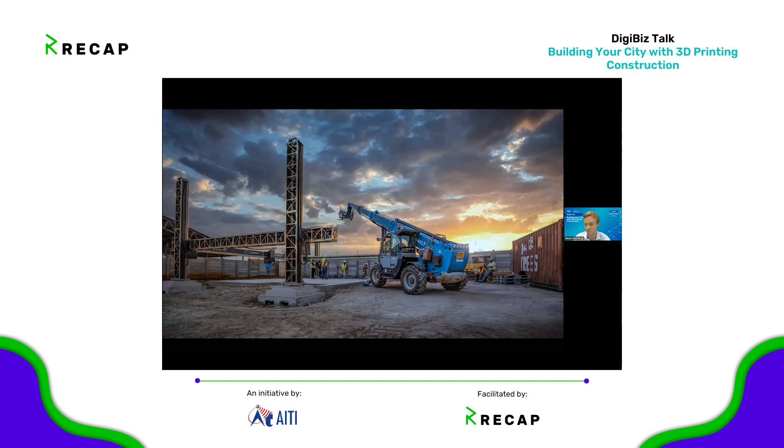COBOD International is a construction 3D printer company. You can see a brief version of it here—I think the image was great, so I wanted to start the presentation with this one. Basically, it's big 3D printers that we put on site to build houses. So let's go through what I'm going to cover today: a short introduction to who we are and what our product can do.

Then we'll look at some product examples—products that come out of our 3D printer. These products have been built throughout the world. I have a couple of examples from Europe with me, and I'm sure Akmal will show something more local afterward as well. Then we're going to talk a little about the benefits of choosing 3D concrete printing and COBOD.

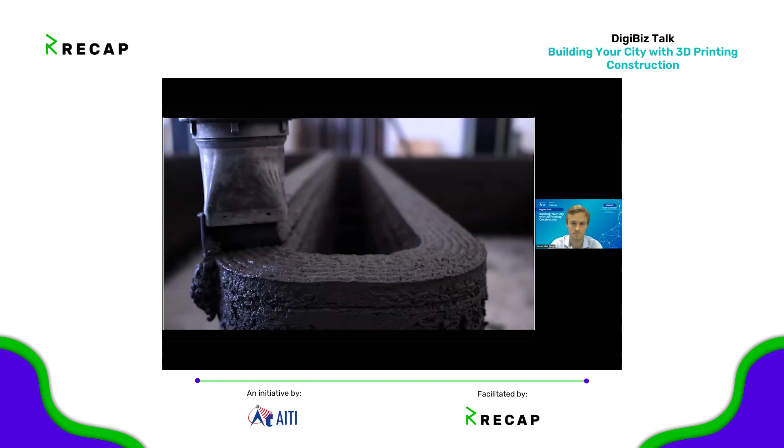I want to start with a little video to give you an understanding: what if your next building came to life faster, better, cheaper, more sustainable? At COBOD, our mission is to build smarter through multifunctional construction robots based on 3D printing technology. Our vision is to automate a minimum of 50% of construction processes on building sites around the world. We partner with our customers, suppliers, and academic institutions around the world to build a future-proof, modular, and scalable 3D printing and multifunctional robotic solution based on an open-source material strategy.

COBOD is headquartered in Denmark with regional competence centers in the US and Malaysia, plus distributors and customers on all continents. COBOD's key shareholders include iconic giants like General Electric, PERI, and the world's largest cement and concrete manufacturers, Holcim and Cemex.

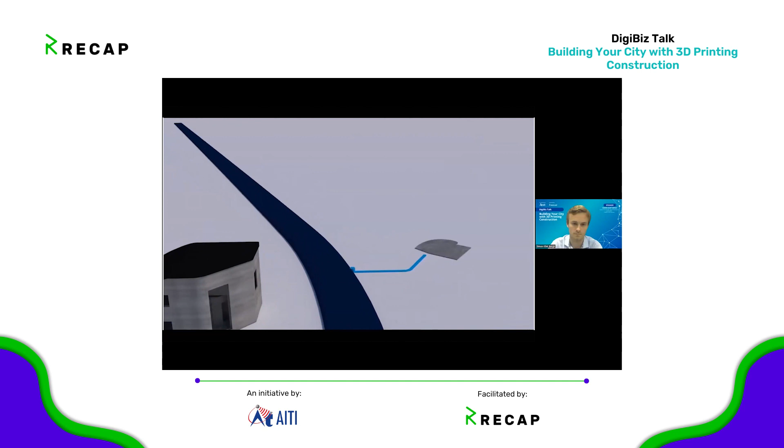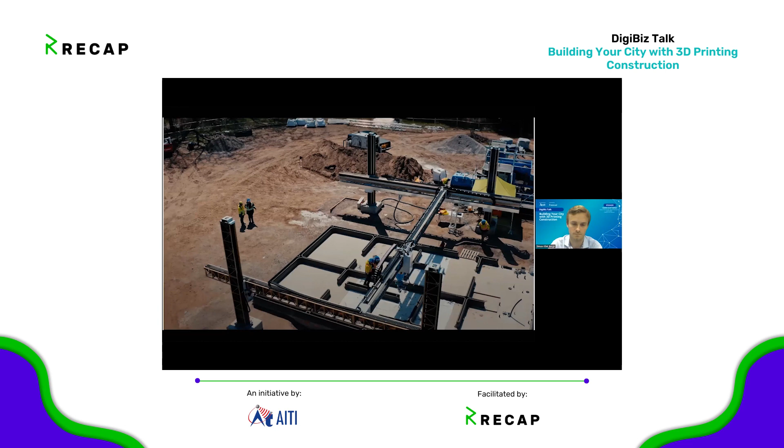We printed Europe's first building in 2017. Since then, customers using our 3D construction printers have printed the very first 2- and 3-story buildings in Europe, the US, and India. COBOD 3D construction printers are now active on 6 continents. We've sold the largest number of printers globally for a variety of building applications—not just residential houses, but commercial, educational, and industrial applications, and even wind turbine bases.

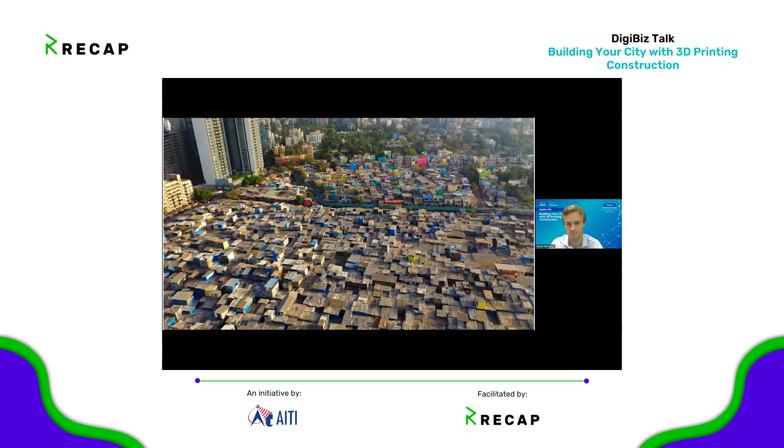We do not come to work just to make a living—we are here for a purpose. 3 billion homes are needed in the coming decades to meet population growth, while conventional construction prices are rising, making them unreachable for the people who need them most. The solution demands action and disruption, transforming conventional practices with tech-driven, efficient methods of automation.

At COBOD, we're disrupting global construction in cooperation with our partners and our team of 100 professional pioneers made up of 25 nationalities. Our roots are Danish, merging an experienced senior management team with young tech wizards, plus a multicultural operational team ready to assist on the ground in multiple spoken languages. We dare to develop cutting-edge innovative solutions which optimize the value for our customers.

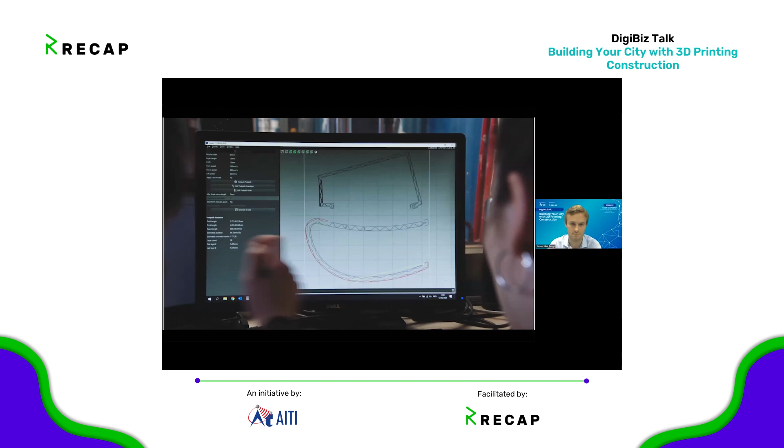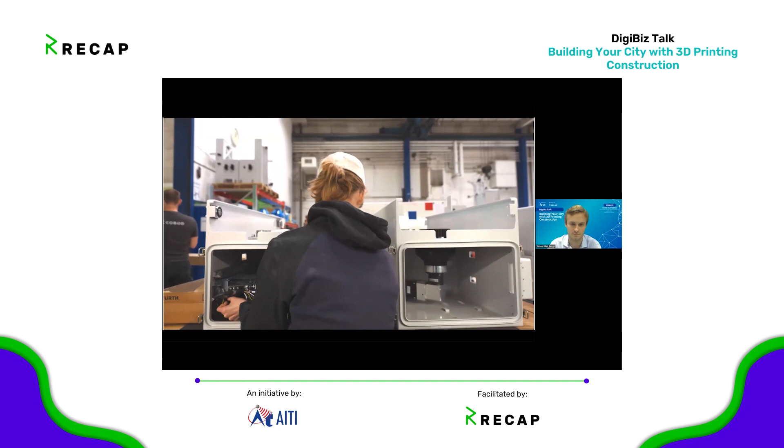We are thought leaders with our new state-of-the-art tech solutions, application areas and size, as well as our material innovation. Our exponential growth documents our customer satisfaction and centricity. Our continued success is directly linked to our customer satisfaction.

We hold your hand all the way from training to installation, making you a world-class 3D printing expert and constantly ahead of tomorrow. We deliver a turnkey solution, including our printer gantry system, a mixing batch plant, pump, and our proprietary slicer software. Our machines are CE certified, giving you peace of mind.

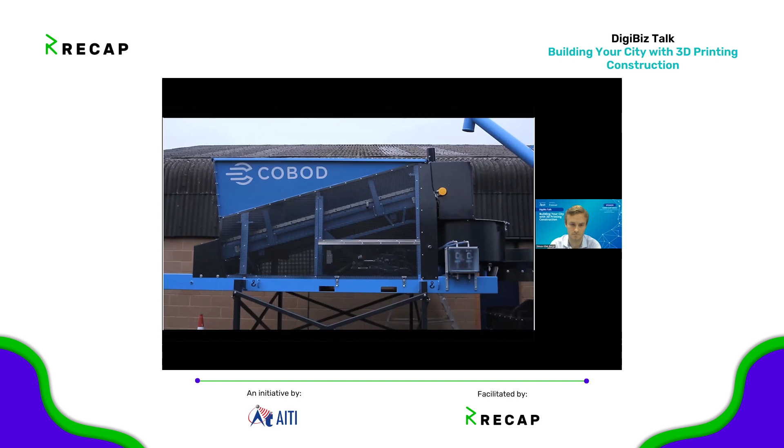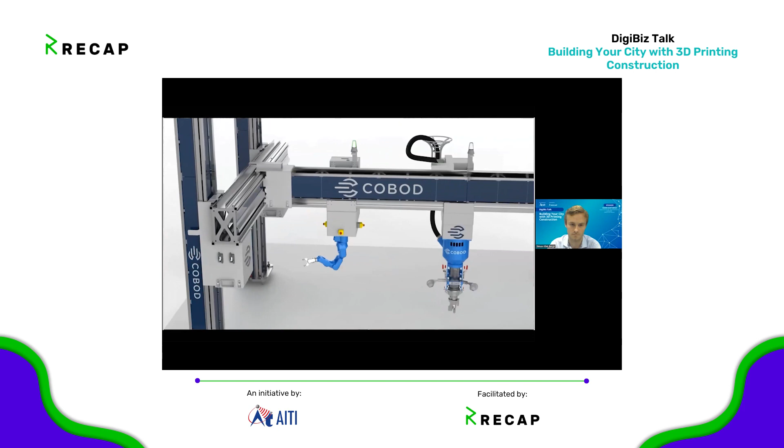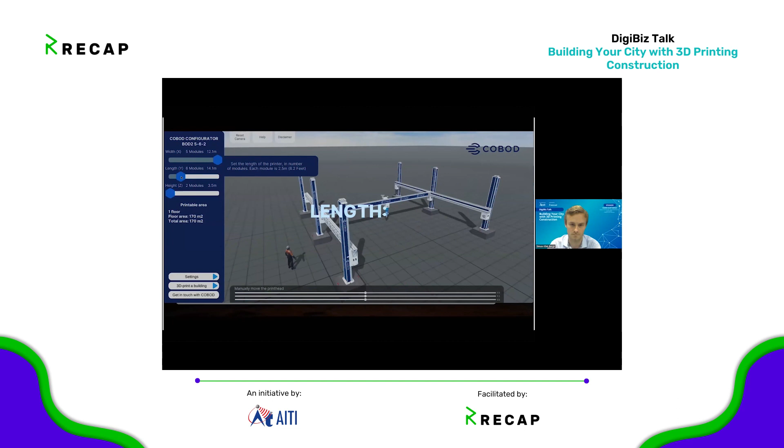We deliver a future-proof solution. Today, a 3D construction printer, and tomorrow, a multifunctional robot, constructing much more than just 3D printed walls. And it can always be upgraded, built on a modular and scalable design where you can always make it bigger and have more features. Use our website configurator and design your own printer.

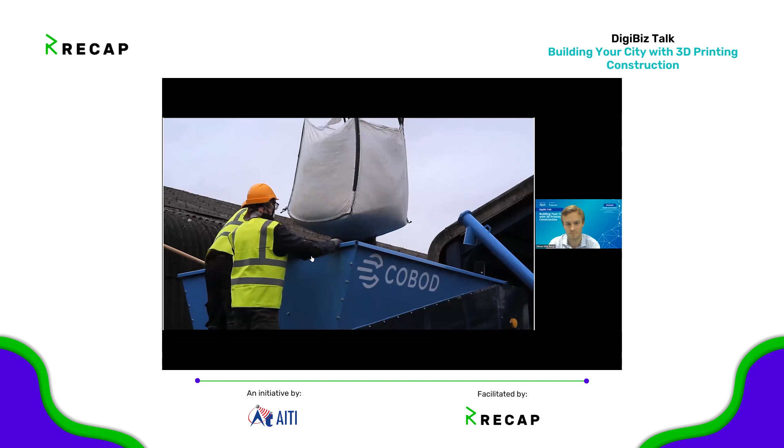3D printing gives you architectural freedom, round curves, smooth walls, better acoustics, and many other possibilities. COBOD uses open source materials. Use any locally sourced cement, sand, and aggregates. Our innovation has reduced material cost up to 90% compared to industry standards.

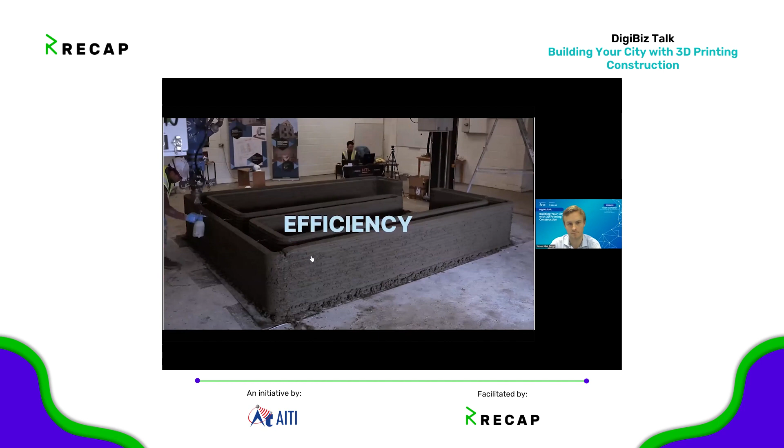We are disrupting the global construction industry to deliver less material waste, minimum labor needed. Only 3 people are needed on site. No one has sold more 3D printers worldwide and gained more in-market experience than COBOD. And we're just getting started. We are COBOD, world leader in multifunctional construction robots.

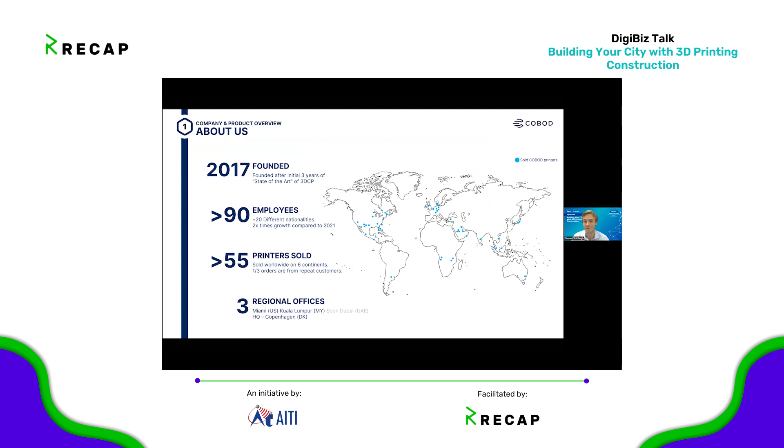So COBOD, we founded in 2017, as you could hear from the movie, basically made on 3 years of research in the market. So we went to 47 places around the world to figure out what is state of the art within construction 3D printing, to bring that information back to our Danish building sector.

So at that point in time, we as a company were only focusing on plastic printing. What then happened was that we figured out everything was only been doing in academia. Nothing was done in real life in Europe. So we set ourselves the goal to print the first house in Europe in 2017, which we did successfully.

And based on that, we got a lot of contacts that wanted to buy our technology. And that's basically the start of the journey we are on today.

So today we're more than 90 people in COBOD, most of them in production and R&D, and then scattered out in our competence centers. We think it's very important to be out with our customers in the local markets. That's why I'm here in Kuala Lumpur, Malaysia, to be closer to the Asia Pacific region, together with Akmal in the same shared offices.

So we sold more than 55 machines to this date. I think this tells 2 things, both that we sold more machines than all other competitors combined, but also that it's a very new market, right? When we can call ourselves world leaders based on 55 machines, you guys are looking into a very, very new market here, which is very, very interesting, and you're on the way to becoming first movers if you want to move into 3D construction printing.

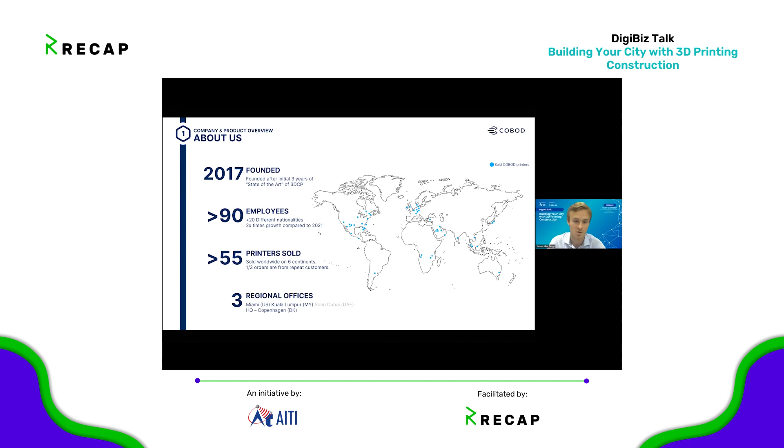So regional offices we spoke about. So basically our focus at COBOD is the technology. We focus solely on getting the technology to as good a point as possible, meaning that our R&D team is actually the biggest team we have within the company. I think it's very important that our technology stays on top, and we address all the new ideas and features.

That our customers want. So that's why we partner with our customers instead. So instead of trying to do everything ourselves, from the material to building the houses, we understand our limitations. We're focusing on what we're good at, the technology, and we have world-class partners around the world, like KA BINA, Akmal, as you're going to hear soon speaking as our distributor for Malaysia. We have that around the world.

Great, both material companies and construction companies and EPCs around the world to help spread out the technology, right? So as shareholders, you also heard we have General Electric, we have Holcim, Cemex, and PERI. All of them very important to us when we took them in was that they were actually contributing to the technology. And we only wanted to take in the shareholders as strategic partners also on development of the technology. So very soon you'll see news from General Electric. We're doing windmill turbine towers with them, with an even larger scale machine that's coming out for that specific application.

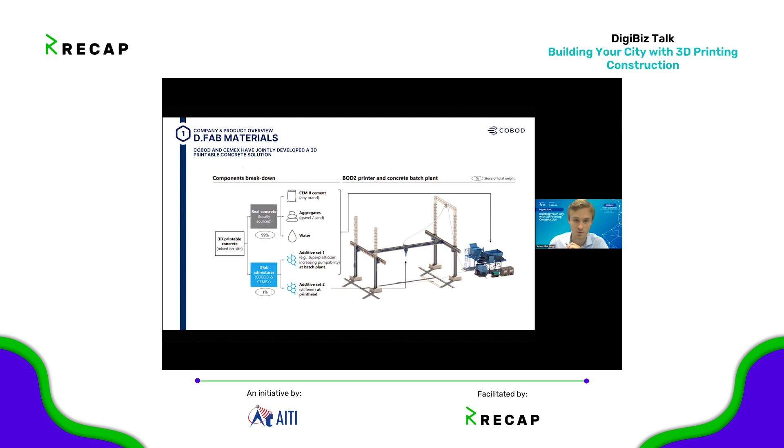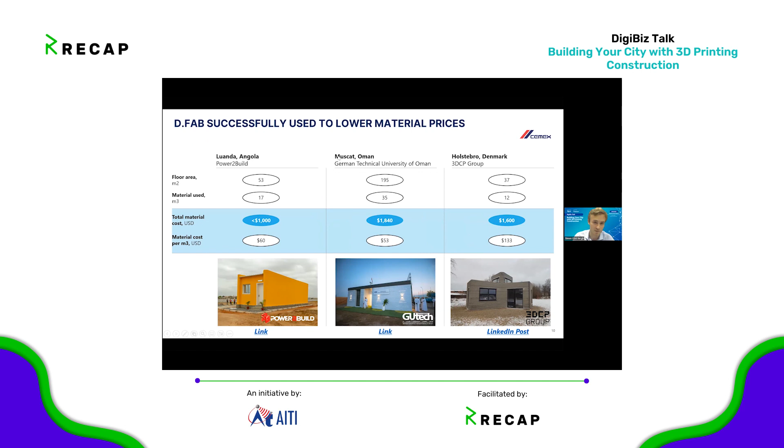So just to tell you what that means, we have 3 examples made with this new material technology. The bottom number here is the interesting one to look at - the material cost per cubic meter. We have a building in Angola, Africa, one in Oman, Middle East, and one in Denmark, Europe. You can see for Angola, Oman, and Denmark, they are all quite low. Denmark is of course more expensive due to the general price level there being very high. But these are comparative to the RMC cost, the standard cost of concrete in the region.

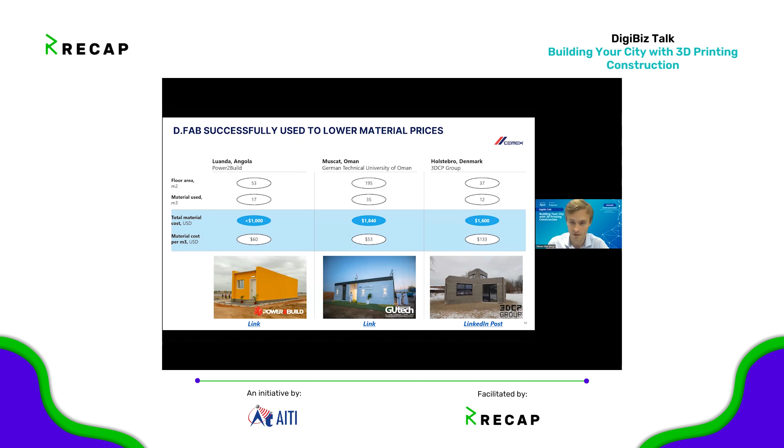Just to give you a comparison, if you use a dry mix mortar, which all the other competitors are doing, you're probably looking at material that's 3 to 10 times more expensive. Typically we could be looking at $500 per cubic meter, which might be fine for a very high-end design. But if you want to do affordable houses and mass scale houses that are economically feasible, we believe this is very important.

So let's go into a couple of examples of what has been built with our technology. I think this Beckum project in Germany is really one of the pearls made very early on with our technology. This was made all the way back in 2020.

What this left them with, which is interesting, is that the other trades - the electricians and plumbers - when they came to the house to install utilities, they actually saved 70% of time on that installation process because everything was ready. The conduits were ready, all the holes for plugs were ready. They didn't have to mill anything because it was thought into the design process. So when the house walls were done, it was already ready for these other trades to come in.

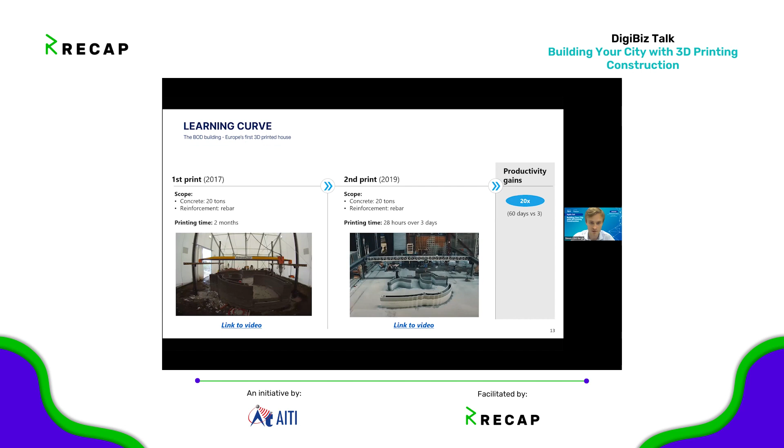And also all these learnings is one of the beauties I'll show you later, is that everybody joining the COBOD family and ecosystem now will be able to benefit from all these learnings.

So third house here, this was actually the first one made with this concrete technology I was talking about with the local materials. I think it's a very, very beautiful build. They utilize the form freedom, and also they leave the walls raw inside. I think it gives a cool and rustic look.

This is of course something you can choose as the builder. You can plaster the inner walls, you can plaster the outer walls, just as you do with a conventional building. You can put wooden structures or brick structures on the outside if you want it to look different as well. You should basically see this as a concrete wall, because that's what it is.

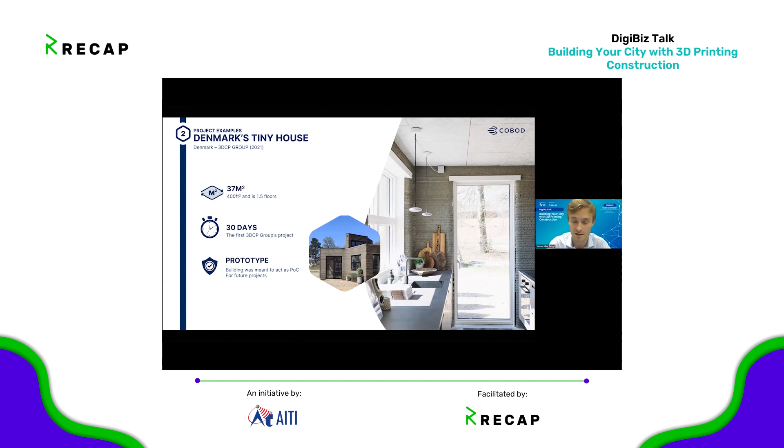So if you look widely at our technology and why it's interesting to be looking at using this for construction, we mainly look at 4 points, and these might be different for the different users of the technology, and there might be more than the ones I'm showing today. So we have automation, speed, sustainability, and design freedom.

So in talking about automation, some of the key components here are that we actually put a robot up on site to build the house. So we lower the need for actual labor. That is good in a couple of reasons, and one of them is, of course, the less risk of accidents.

One is that we get a better precision than man-made structures, because the machine is within millimeters of accuracy. So the way you draw it is the way you will have it, which also gives a lot of confidence to the other trades coming in afterwards, putting in windows, doors, conduits, and so on. And of course, lower cost in terms of labor as well. I think actually lower cost in terms of labor is not the most important part.

I think it's the better precision and the lower accident amount which are super interesting. In terms of speed as well, you could see the learning curve from PERI and ourselves. Now we've actually come to very interesting speeds for building houses, meaning you can build 50 square meter structures with 4 meters to the ceiling in less than 20 hours if you master the technology, which can really speed up the delivery of homes, a big problem these days given the amount of homes we need to get made.

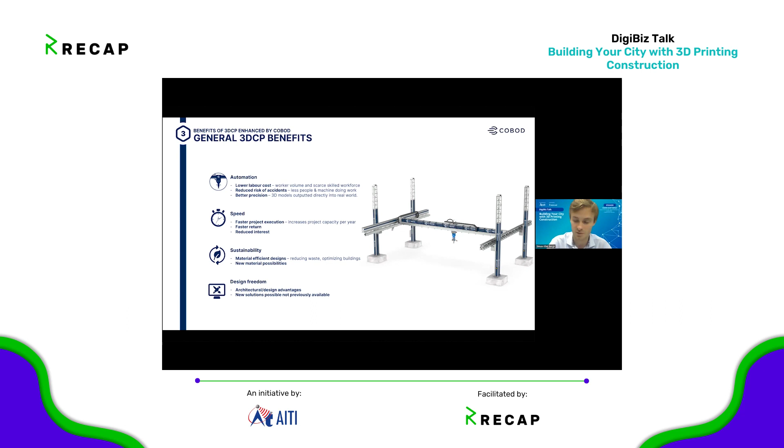And then of course, at last, design freedom is a big advantage of the 3D printing system, as it is with metal 3D printing and plastic, in that you can do any shape you want in the X and Y axis. So a rounded wall will cost you exactly the same as a square wall or a straight wall. In a conventional precast or brick-built manner, it would be a lot more expensive. Here it costs the same.

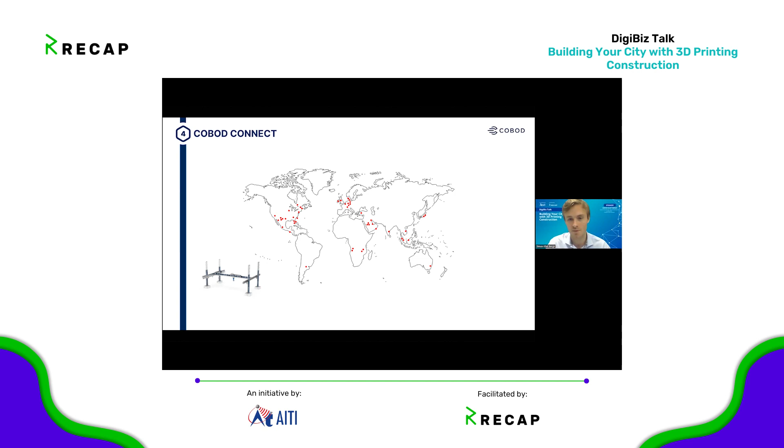So lastly, I just want to show you our world map here of where we have customers. If we turn all these customers into knowledge hubs, because that's exactly what they are, all these places the technology is getting used right now as we speak, we actually have a huge force, because there are so many people in non-competing markets looking at implementing this technology and learning as much as possible. So that means we have a lot of people willing to share knowledge and information.

So basically what we have made is a forum, knowledge base, and academy called COBOD Connect. All these are made so that new customers will have less of this learning curve, and also so that the full capacity of all our users out there will be reached even faster.

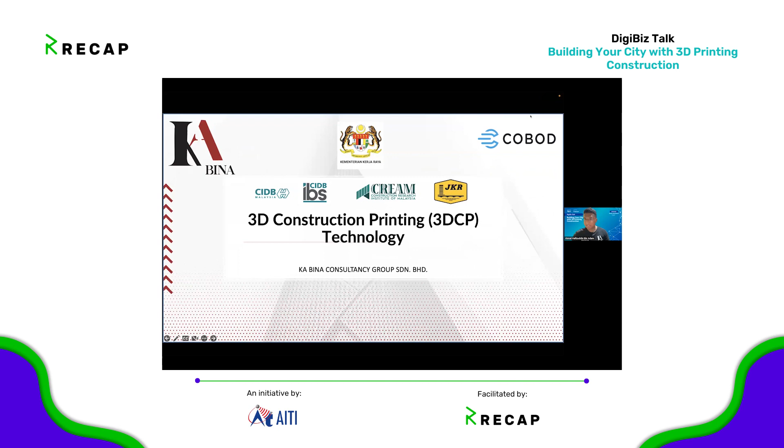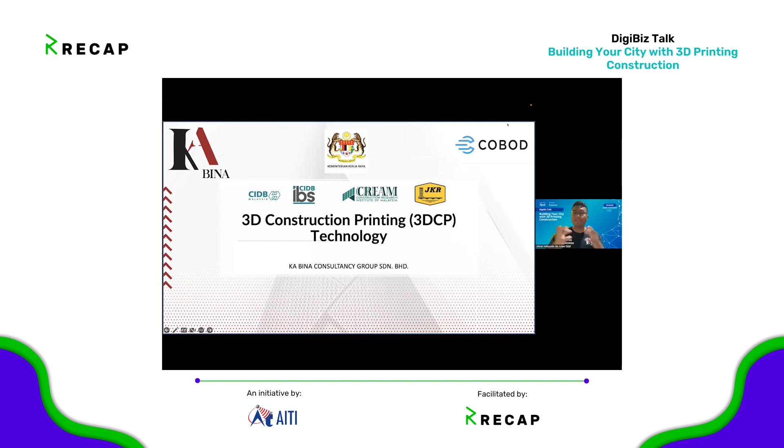So basically sharing the 3D construction printing, or we call it 3D CP, implementation for Malaysia, Singapore, and the region's adoption of this technology. First of all, my name is Akmal. I'm the co-founder of KA BINA consultancy group, whereby we brought COBOD's technology to Malaysia.

Now before anything, I would like to start off with the origin story of KA BINA. Where did we come from? The story of KA BINA started back in 2020, where a group of 4 co-founders, a group of my friends, sat down and wanted to tackle affordable housing issues. Amongst other issues faced in our country, we identified that affordable housing is one of the issues we would like to tackle. Now, simply coming up with another construction company wanting to tackle this issue head on, we figured, why not try to adopt the latest and most advanced technology to this issue.

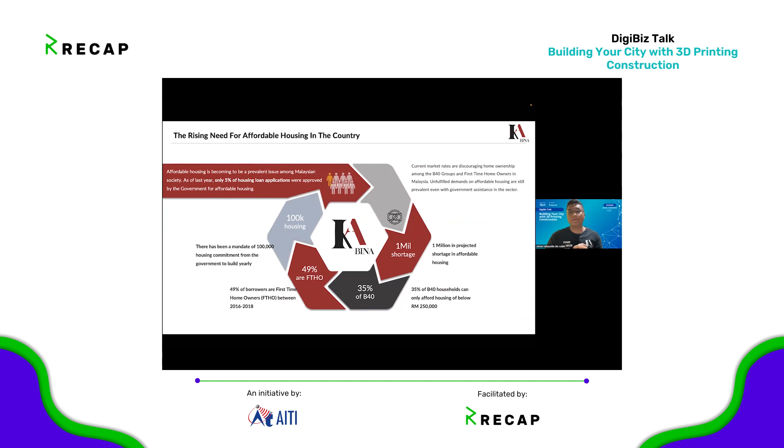Because if you look at the statistics, let's talk about Malaysia. There's more than a 1 million shortage in housing, and 100,000 houses are planned to be built by the government to settle the issue of affordable housing.

Now, when we are talking about affordable housing issues, it targets two major groups of people. Number one are those under the B40s. The second one are first-time homeowners.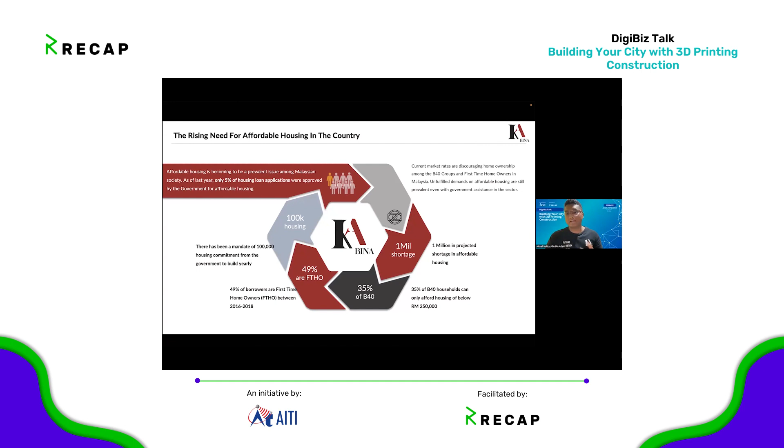People such as myself, fresh off the university stage, wanting to get into the working life—trying to get a house nowadays is very difficult. First-time homeowners, the B40s, this all accounts for the 1 million units of housing shortage we're facing in Malaysia. We saw there's an opportunity and initiative by our local government to build more than 100,000 units of housing to accommodate this demand.

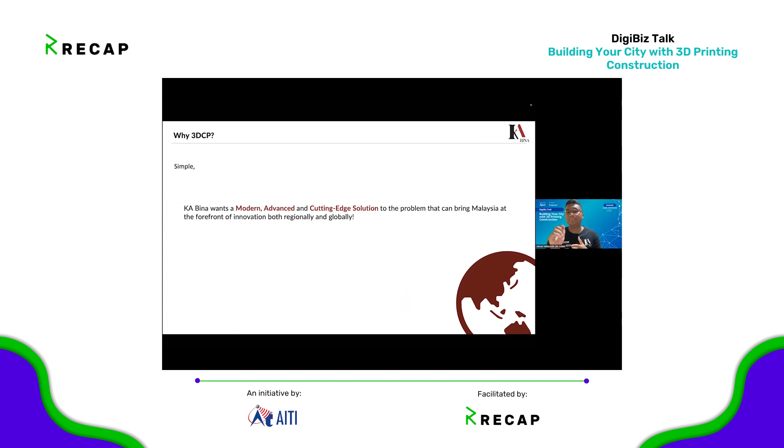So first, we wanted to tackle this issue of affordable housing. Second, we did not simply want to come up with another construction company tackling this issue head on. We figured, why not adopt the latest technology in the market? So we were scouring around, looking at potential technologies we could adopt, and we identified 3D construction printing as one of the methods growing in interest and progress. So we reached out to COBOD, and that's how the story started with KA BINA and COBOD, our collaboration for this region—Malaysia, Singapore, and Brunei.

Looking at this, riding on this growth, we see that 3D CP must be a component adopted by this region as well. Because as the understanding of additive manufacturing grows in the market, it's only a matter of time before construction is up there too.

Now, Simon has raised the same point I'm going to make, on the benefits of 3D construction printing. Number one is its speed. Number two is cost. Number three is labor requirement and digitalization, and of course flexibility of design, reduction of waste, and mobility of the machinery.

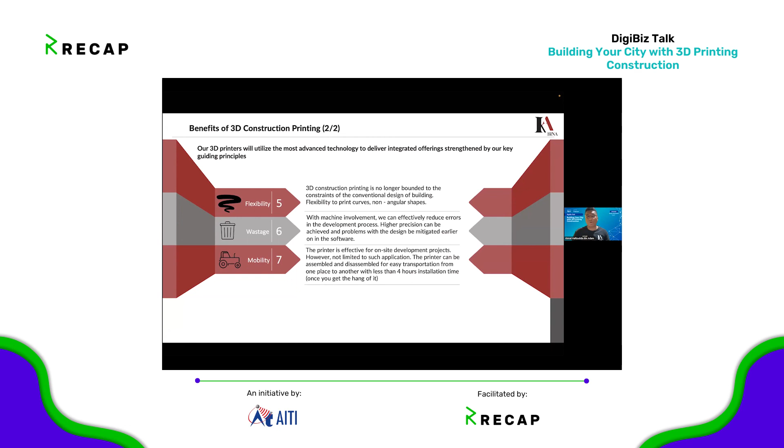Now, these are all well understood, right? The caveat here is, once you are efficient and once you've managed to identify the best ways to utilize the technology, then you can manage to achieve all of these benefits being highlighted.

So this is just a reference point to the UK, because this is the only write-up I've managed to find so far—a research done in the UK that shows the application of 3D CP in that market. There's a reduction in overall cost of 33%, and a 37% decrease in the time taken to complete a unit of house. The reason I'd like to showcase these results is because it is quite a reference.

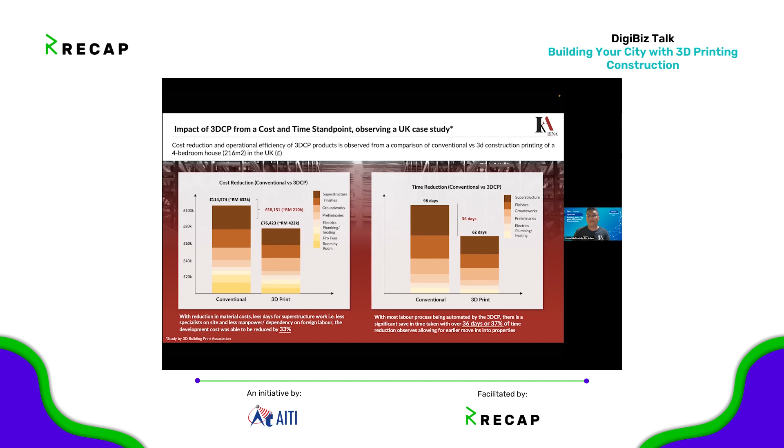Later I'll show you some images of the first 3D printed house that KA BINA printed last year. So these statistics hold their ground on what we believe can be achieved with the house we've printed so far. So we well understand where KA BINA comes from—it stems from the need to tackle affordable housing, and we've identified 3D construction printing as the best method to go through with it.

But now you might ask, why COBOD? I can well say there are other 3D CP providers out there in the market. You can Google—there's Apis Cor from the US, there's Icon from the US, there's Winsun from China, there's CyBe. So all these companies are trying to make a name in the 3D CP market globally. But why did we decide on COBOD?

This is a very important aspect to understand, because it will shape how our clients in the region view this technology. Number one, the most apparent reason, which I have yet to include in my slide, is definitely the open source nature of its material. With COBOD's machine or system, it is material agnostic—meaning the local materials you have are the ones you'll use with the machine, which is not the same for other suppliers.

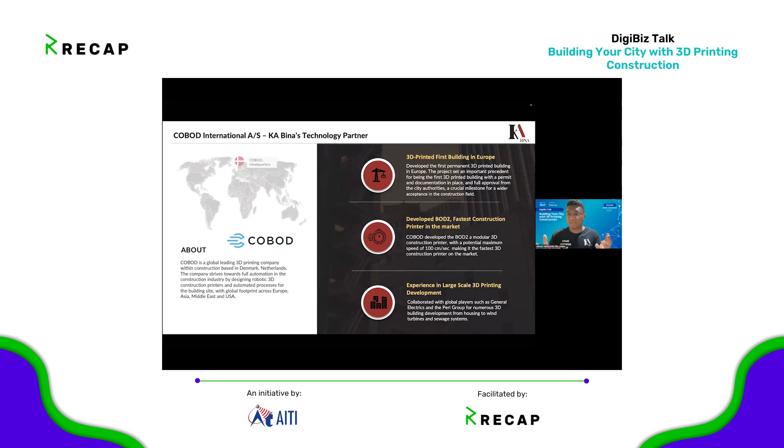For example, Icon, if you buy their machine, you must buy their material as well. Same goes with Winsun, same goes with Apis Cor. So all of this accounts for the increase in price. If you have to buy the machine, you have to buy the material from them as well, and they are not locally made wherever you are stationed, it's from the US, it's from China. So getting the cost to transport it here is expensive. So cost-wise, you are going to save a lot in terms of materials.

So that's why we went with COBOD. Number two is, of course, they have the largest presence in the market. They have strong backing from large companies such as General Electric, such as PERI. Even for PERI, it's a good sentiment to point out. PERI is the largest formwork provider in the world, meaning that with using 3D CP, you are practically eliminating formwork.

So why is it that the largest formwork company wants to invest in a company that's actually their competitor in a way? It's because, if you can't beat them, you join them. So that's where I think it stems. The idea of PERI wanting to invest is actually a good allegory to what's going on in the market today. So I believe the strong backing of all these giants is what convinced us to adopt this technology here in Malaysia, Singapore, and the region.

And also they are the developers of the fastest printers in the market, able to print at its maximum capacity, which is very dangerous. The printer can move up to 1 meter per second. So if a machine of that size moving at 1 meter per second hits you, you will die, definitely. So it's very dangerous to be operating at such speed. However, it is a testament that the machine is capable of going very fast.

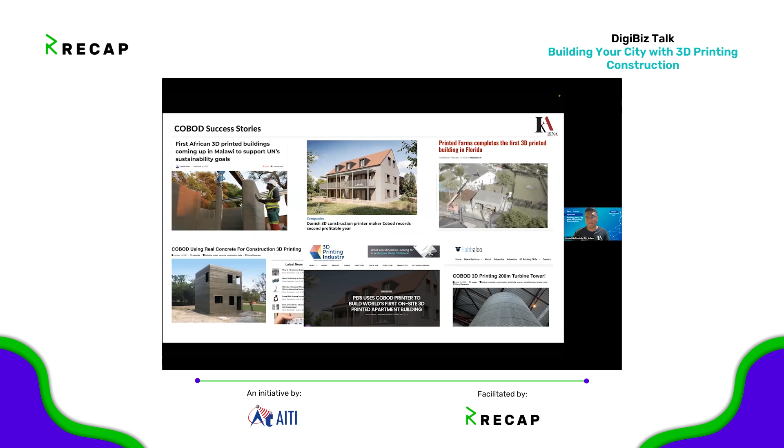Next, just to highlight some of the success stories from COBOD, as I've mentioned, they have strong backing from PERI, General Electric, Holcim, Siam Cement Group in Thailand, and also Cemex from Mexico. These are some examples of success stories from COBOD around the world that you can find online. Just Google COBOD, you will definitely find all of these success stories and testimonies.

Next, let's talk about this region. For KA BINA, we are stationed for both Malaysia and Singapore. You also have Siam Cement Group from Thailand, JGC from Japan, L&T from India, Bakrie & Brothers from Indonesia, Vietnam is coming up, and Fortex from Australia. Now it goes to show that the adoption of COBOD's printer or this technology is growing widespread in this region. Thailand just got their printer.

Japan, JGC, which is a very huge company - all of these are very huge companies. I'm sure those of you from the contractor or developer background know these names from all around this world. So it goes to show that companies everywhere in this region are starting to adopt this technology, because this is the future. This is what KA BINA and COBOD believe to be the future of construction. And we have to start now, definitely.

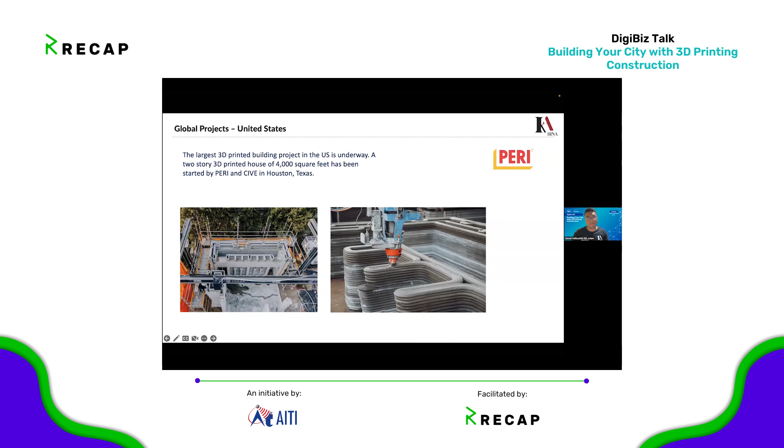Again, these are some examples of global projects. This is one of the very impressive printing projects currently ongoing in Texas by PERI. It's a very large 4,000 square feet home, developed with very unique designs that you can see in terms of its structure and printing capability.

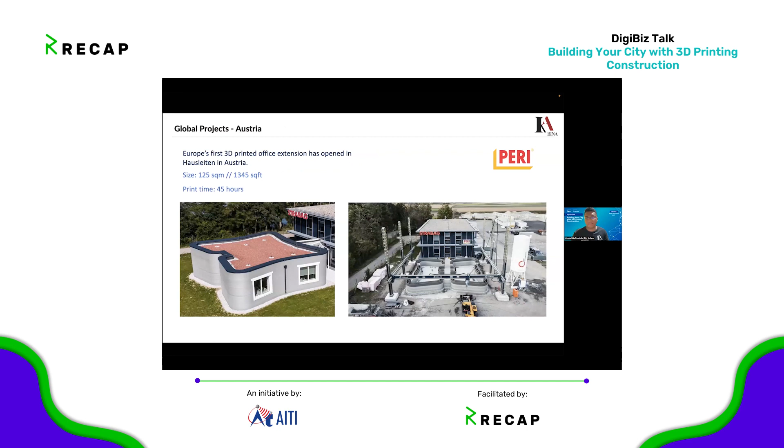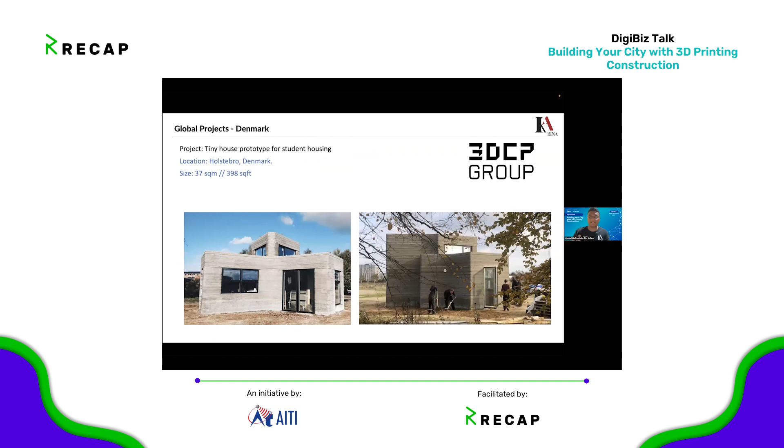This is another example of a design that was printed, an office area for PERI over in Austria, completed within 45 hours. I think Simon has mentioned this one - it's completed, and it's actually the first concrete printer that uses concrete material to print the house.

They printed one cafe of about 800 square feet in under 3 days, a toilet structure in 2 days, and a house unit for a fisherman in the next 3 to 4 days. In total, they've managed to print 3 structures in just under 8 days. This was done by a research institute, not a construction company or developer. So it goes to show that with experience, you are able to produce more in lesser time.

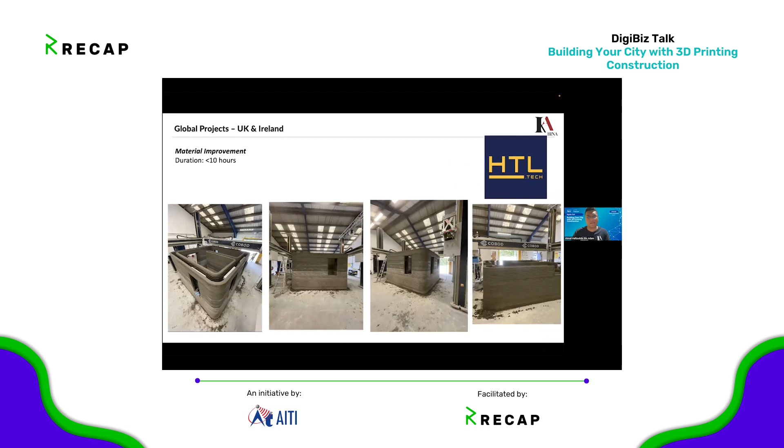Just to highlight some examples, this is a company from UK. They've managed to print this very simple structure in under 2 days, less than 10 hours actually.

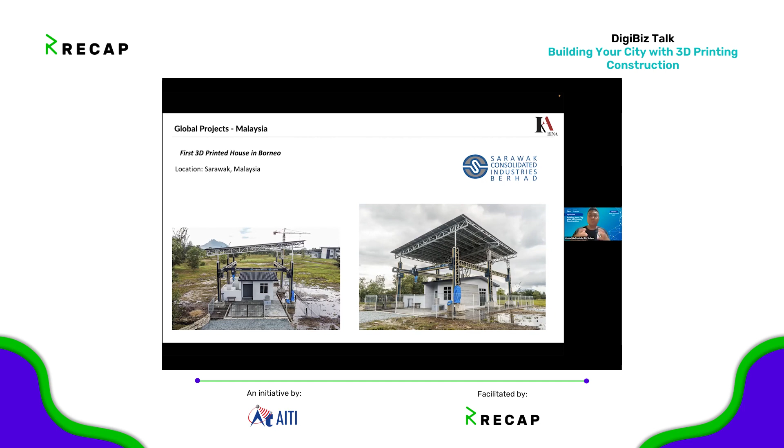Another example Simon mentioned, from Sarawak, which is very close to Brunei, where you guys are stationed. There's a company called Sarawak Consolidated Industries Berhad, where they've printed this house as the first 3D printed structure in the Borneo region, as far as we know. They completed this unit earlier this year. So it goes to show that the presence of COBOD's machines and the products developed by all these 3D CP players in the market is very close to where we are stationed. It's near our doorsteps, already here.

Now I'd like to show where KA BINA's progress is. As you can see, it doesn't look as palatable as the other structures I've shown you earlier, simply because these are actually the first structures that we printed. We acquired this machine last year in August, and that's where we had to do our material research and R&D, because if you acquire this machine, the template recipe given is from customers outside the region you're operating in.

We were working on a recipe we got from Angola. Angola developed their material recipe that seems to work for them. We took on their recipe and delved into material research, doing R&D to improvise - to reduce the cement, increase the water - just to make it viable for the local climate we are operating in. So the structure you're seeing is our first printed structure with a working concrete material.

That's why it doesn't look as pleasant, but we were definitely very proud of the achievement. We managed to get this structure done after 3 months of material testing with the machine. We were definitely assisted by COBOD - they are material experts who were there to ensure we achieved success in printing this structure with workable concrete material.

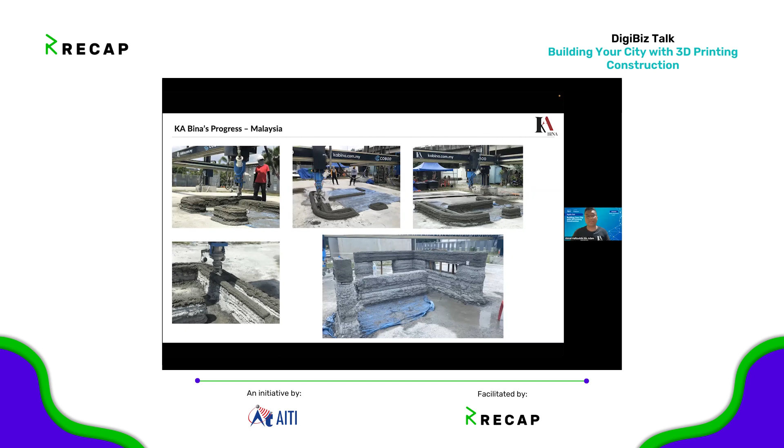Now, the house that I was talking about - KA BINA is the first company, at least in Malaysia and Singapore, to be 3D printing a full-fledged house on site. It was completed in February of 2022, this year.

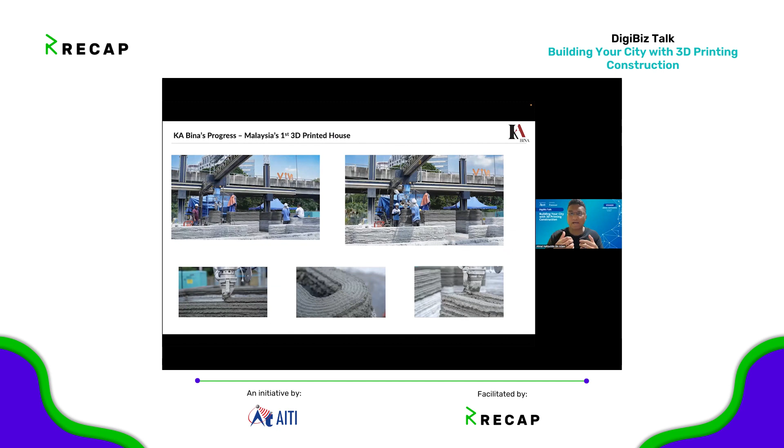I think I'd like to share a video. Can you guys see the screen now? Yes, alright, just bring it up.

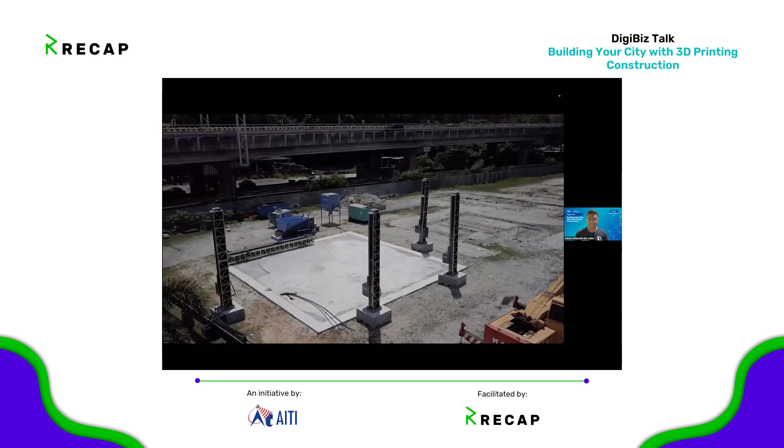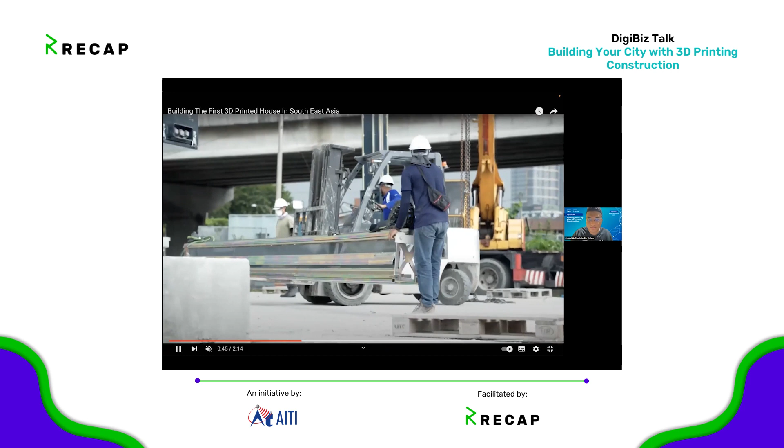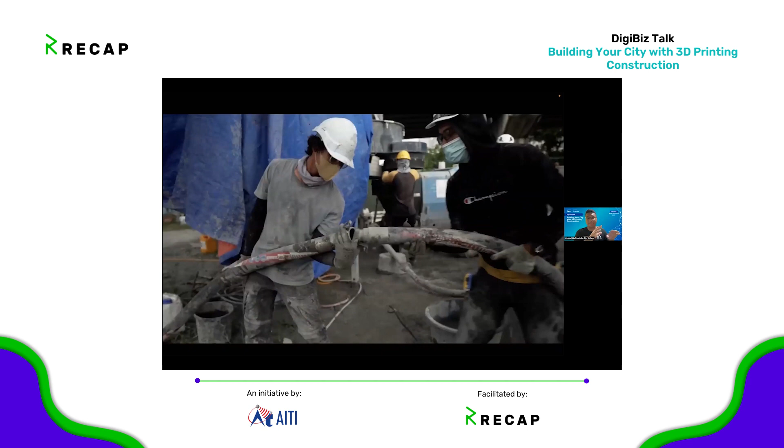The machine came in 2 40-foot containers. I saw 2 massive containers that house the machine - that's basically from shipping from Denmark, where we got the machine from. It was shipped in 2 containers: one container houses the printer itself, the other is for the other machinery - the batch plant, the pump, and the silo. That's why you have 2 containers being shipped in.

Wow. And how big is this plant here? The plant, the size, the area size of your project.

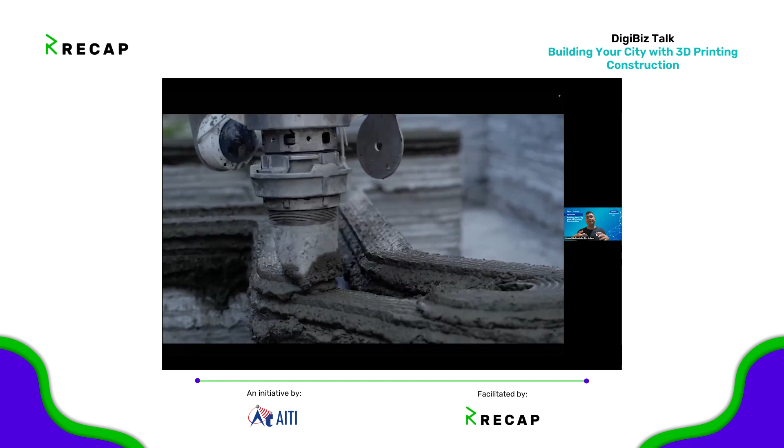Oh, the project. Okay, so basically this house is roughly about 1,400 square feet. So the space that we are working with is around that size. And the printer is actually our size of printer.

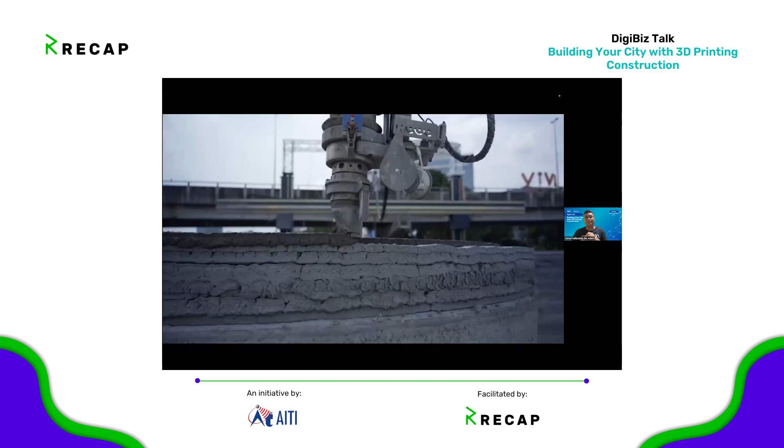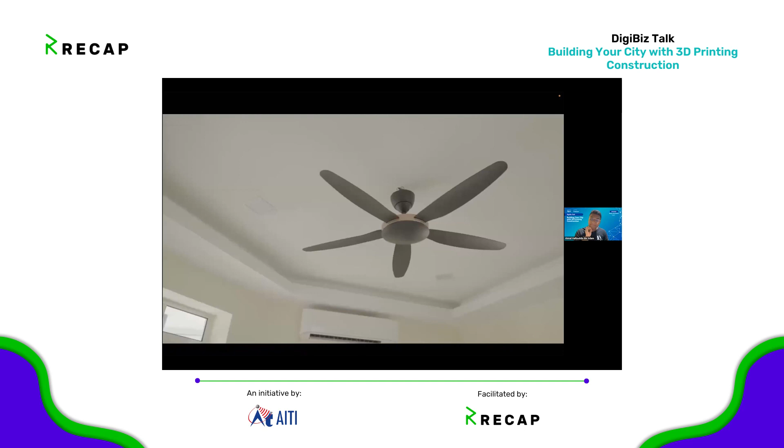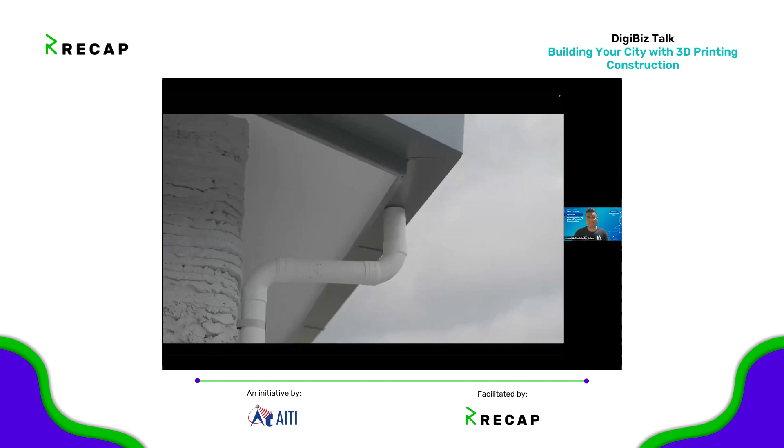I think Simon has mentioned it is modular. The size of printer that we went with for our first order is a 5-5-3, meaning it is 12.5 meters by 12.5 meters and 7.5 meters in height. So it means it's capable of printing a 1,500 square foot, 2-story home. That's the size of printer that we have. That's our first printer, and our second printer is also of the same size. So yeah, I think that's the printer that we have in terms of its size.

So of course, this is the first structure that we printed. There is room for improvement, definitely. We are well aware of that. But in terms of its structural integrity, it has been verified by a local institute that checked the structure of the walls, whether there is any compromise in terms of structural integrity. There is none. So it has been verified.

Although in terms of its finishing, it's not as nice. Bear in mind, this is the first house that KA BINA printed. Although we had a working recipe, trying to achieve the efficiencies to make it look nicer, all of that requires more practice, right? And we believe with our upcoming project we will manage to achieve those efficiencies that we sought for, definitely.

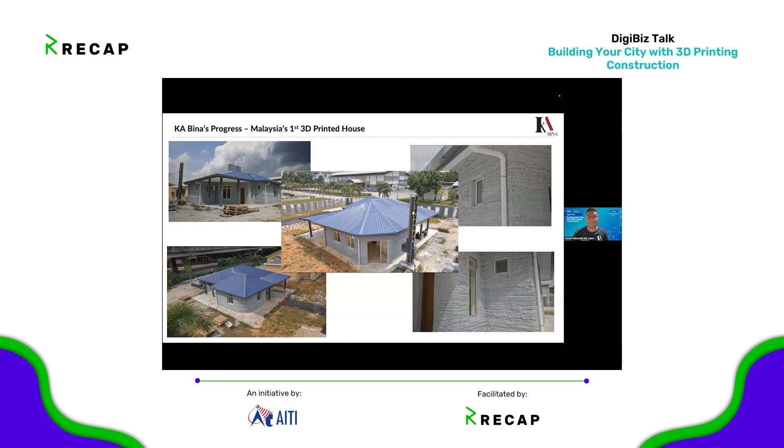Congratulations, well done. Thank you very much, truly appreciate it. Everyone was quite amazed that we, a very small company, are capable of 3D printing this.

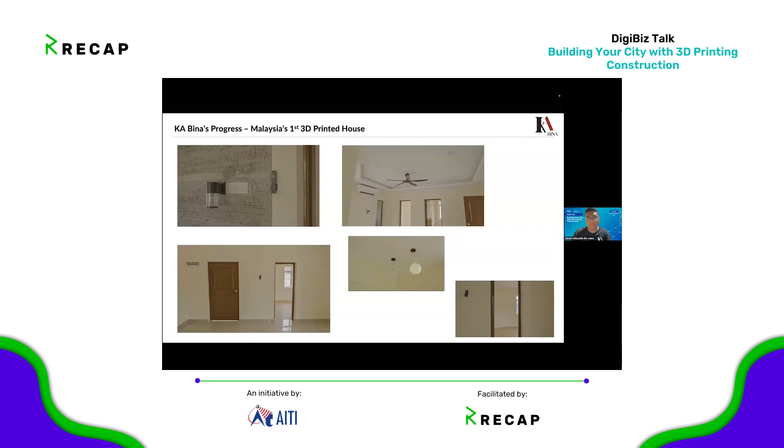And these are some of the images or visuals of the house that we have. This is the interior, and I think we can go through an in-depth explanation about how the house is being made, what type of material we use. Even the house, it's a load-bearing wall, meaning there are no reinforcements at all for this house.

Just bear in mind, an additional detail to share here - the house that we 3D printed is actually a load-bearing wall concept, meaning there's no reinforcement, no rebars, except for the lintel area. That means for the doors and windows, the top part, in order for us to get the support to hold the structure from the top, that's where you put the rebars in. But other than that, there are no rebars at all. And we've actually gotten a consultant to sign off on this design.

So to the market that's concerned, I know some of you with developer or contractor background must be wondering, can it be, is there an engineer who will sign this? Actually, yes, there are engineers that have already signed off on the house. It's already gotten approved.

In terms of its structural perspective, that's where we are coming at. So don't be too concerned about getting approval. You can get it, because it's not to say that if you are using 3D printing, you must go with load-bearing wall. You cannot have reinforcement - that is not right.

So with 3D construction printing, I think the concept here is that it is simply another tool for you to develop any concrete structures that you are thinking of. If, for example, your structural engineer requires you to have reinforcement, hence you can have reinforcement.

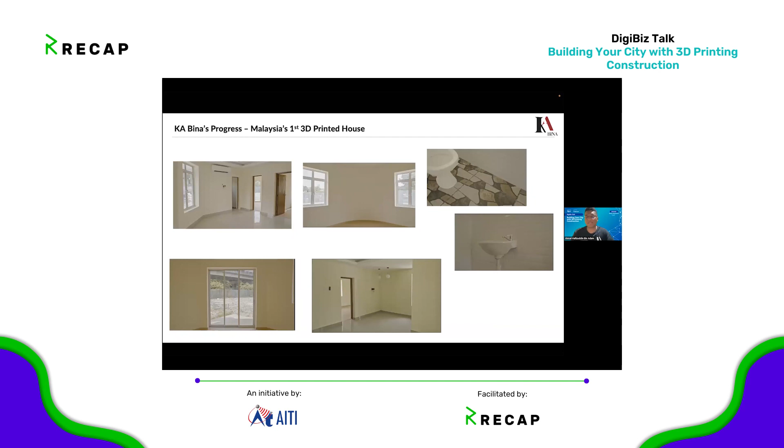And the way the 3D printer can go about printing is by printing the outline or the formwork for the column all the way up. You put in your rebars and simply pour concrete. Now that is one of the ways that you can achieve reinforcement with 3D construction printing. Just to clarify some of the questions that the audience might have later.

So now I'll go through the brief process of how 3DCP works, at least with COBOD's technology.

First, it starts from the design of the house itself. You just need to prepare an architectural drawing from whatever software you have, whether it be AutoCAD, Revit, or even SketchUp.

Just for your information, which is very interesting, the first house that you saw just now was actually designed using SketchUp. So it goes to show that the slicer software developed by COBOD is agnostic in terms of where the designs are coming from, as long as you export it in an STL file format. Then the printer will understand how many layers it needs and so on.

Through the COBOD proprietary slicer, you will know how many layers you need to complete the house, how long it would take, and how much material you need to complete the whole house. All of this data you can get earlier on from the slicer software itself.

Bear in mind, in terms of material, you have to add between 10 to 15%, just in case, when working out how much material is needed.

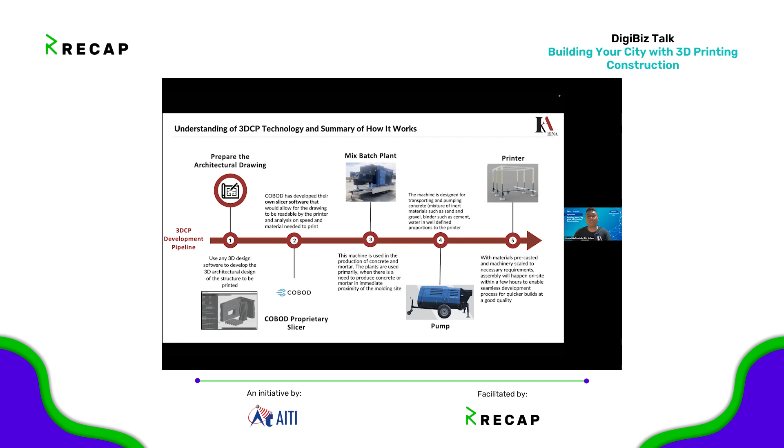Now again, the machine is modular in size, as mentioned by Simon earlier, meaning if you are going for smaller structures, you can opt for a smaller printer. If you would like to go larger, you can simply install more modules. One module is about 2.5 meters, so you can add on to make the machine larger or smaller depending on the design you'd like to achieve. That's the beauty of the modular design of the gantry system provided by COBOD.

Now, we've talked about where we are coming from as KA BINA as a company. We've talked about why 3DCP, why it must be COBOD, the process, the end result or the product that has been generated by COBOD and all the developers around the world. We've talked about the process of 3D construction printing as a whole. Now let's talk about the end results that you can achieve with 3DCP.

I think this is very important to highlight to everyone listening today. With 3D construction printing, you are not just focusing on housing. So KA BINA itself, we've had a revelation going through the journey of using this printer, and also talking to all the relevant stakeholders from everywhere, from regulators, from contractors, from developers, from research institutes. We understood that although the starting point for our company was affordable housing, that's not necessarily the only thing you can achieve. It's not just housing.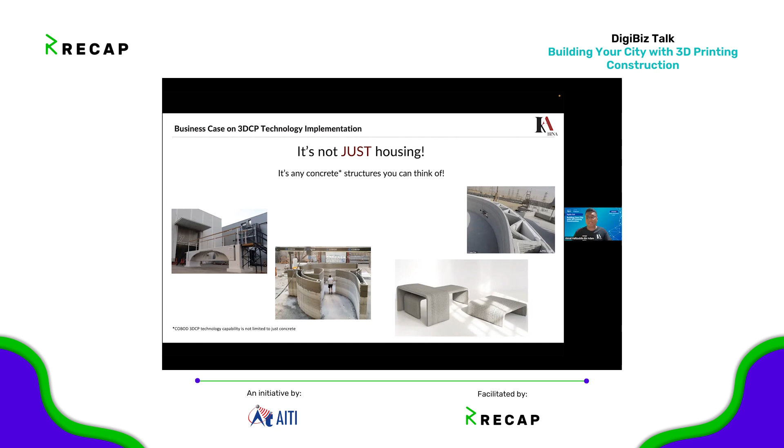Also, just to give some of you guys the idea, using 3D-CP, we believe that you can meet some of the SDG goals due to the implementation of, if you're using concrete 3D-CP materials, one of the ways that you can achieve the SDG goals is if you are using recyclable materials as filler materials in the concrete you are 3D printing, which reduces the amount of CO2 emissions from the concrete you are using. Bear in mind, if you're using COBOD's printer, you are material agnostic, meaning you are not reliant on simply one recipe. As I've mentioned, although KA BINA has come up with the first workable recipe for this region, it's not necessarily that any of the other developers or contractors must use the recipe that we've established. You guys can come up and develop your very own material, whether it be with recyclable materials, geopolymers, or any other materials that you would like to be used for your concrete developments.

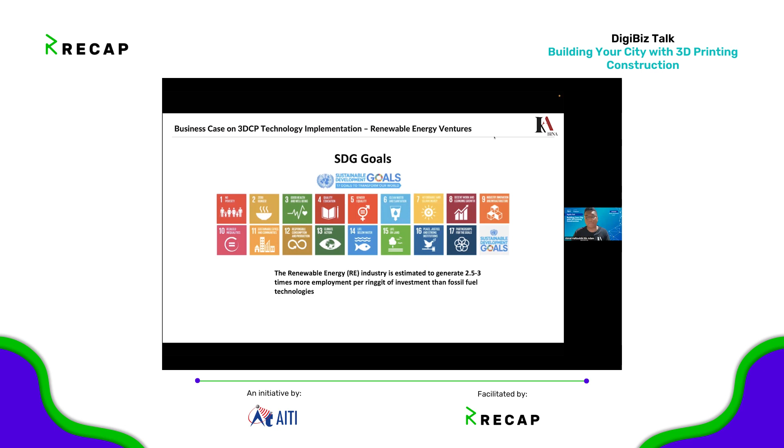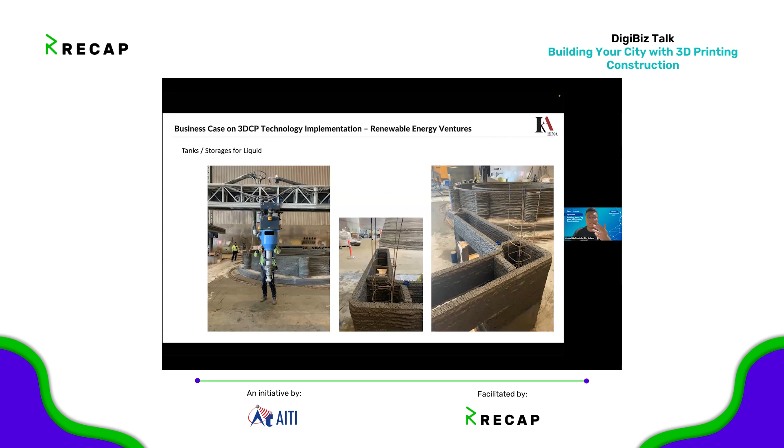And these are another examples. There are 3D printed EV charging stations already. There's also, like I've mentioned, water tank applications, storage tanks for liquid that are being 3D printed. And also, just to showcase to you guys, this is the way for you to achieve reinforcement with 3D printed structure. So you are printing the outline or the formwork for the structure that you would like to put the rebar in, and you simply pour concrete once everything is done. So there are the tanks and storages for liquid and gas. And again, GE's impressive project to develop the base of a wind turbine.

And yeah, so where does KA BINA come from in terms of our services? We provide consultation. We are in the R&D process. We provide the raw material research, the 3D printer, technical support, training and delivery, and regional engagement.

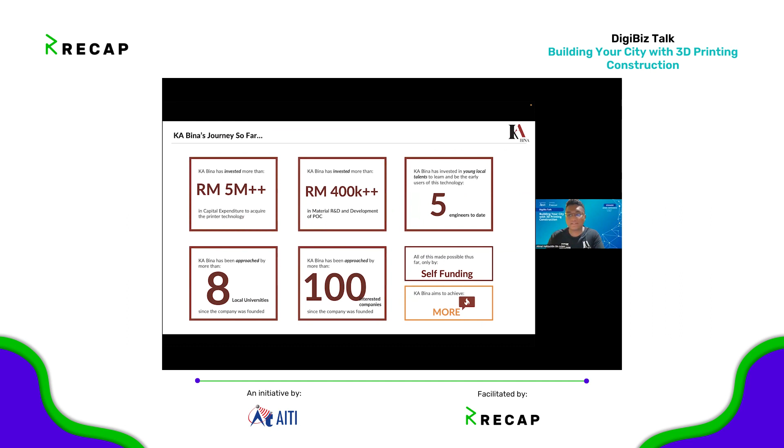And as a company, what have we achieved so far? We've invested more than 5 million ringgit to acquire both machines. And also we've invested more than 400,000 ringgit in terms of our R&D material development. We have actually 5 engineers to date. More than 8 local universities have reached out to us, and more than 100 companies that are interested in learning and wanting to acquire the machine so far for both Malaysia and Singapore. We have yet to have one from Brunei. So I'm actually interested to see if there's any Bruneian companies that are going to reach us out after this.

And also through the progress that we've made, the investments that we've made earlier on, these are some of the achievements that we've made. We've managed to reduce clogging rate by more than 60%. The printer setup time was reduced by more than 40%. Cleaning time was reduced by more than 50%, and loading material is also reduced by 50%. Again, these are the efficiencies that you can expect once you are more familiar and more experienced in using the technology. It is with any technology in the market. Early on, yes, you are going to face problems, but when you are familiar with it, you find a better and more efficient way to go about exploring the use of the machinery.

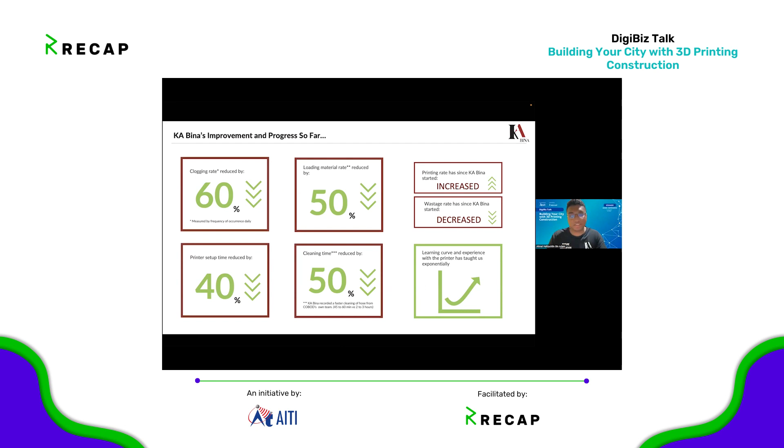And these are some of the potential improvements that we can make to the technology. For example, there's the ready-mix concrete solution with 3DCP application that KA BINA believes we can adopt, because there's existing infrastructure that already produces RMC. Why not tap into that existing infrastructure to make it 3D printable?

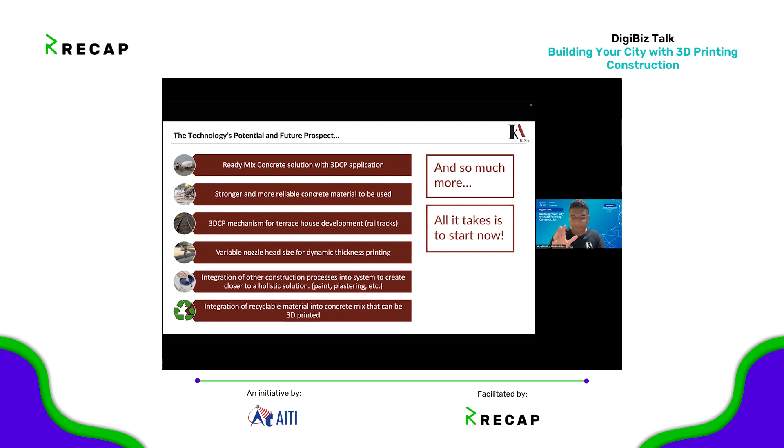So not only that, we can explore stronger and more reliable concrete material. There are mechanisms to have rail tracks for the machine, variable nozzle size, integration of other construction processes, which has been highlighted by Simon earlier on. It's not just a machine that prints the walls. Moving forward, you can expect the paints to be done by the machine, the plastering to be done by the machine, all of it taken over by the machine to build a robot, basically, at the end of the day.

Now, what is our commitment? So basically, both KA BINA and COBOD are now working as joint partners to assist a successful adoption of this technology here in Malaysia by having them on board to be in Malaysia. Simon is the CEO of COBOD Asia Pacific, so they've already been stationed here in Malaysia to accommodate the requests, demands, and understanding for the whole region. So it's very near to Brunei as well.

And these are other commitments we've had. We've had our Minister of Works come down and visit the first 3D printed house in Kuala Lumpur. We've managed to nudge our Ministry of Works to develop a national level working committee to look into 3DCP for their project tender specification. We've signed an MOU with CIDB, Malaysia's local regulator for construction. We've also signed a few MOUs with UTHM, Heriot-Watt, Sunway University on the way, University Malaya, and more.

And as I've mentioned earlier, we've developed the first workable 3D printable concrete, and also we've printed the first 3D printed house in Malaysia.

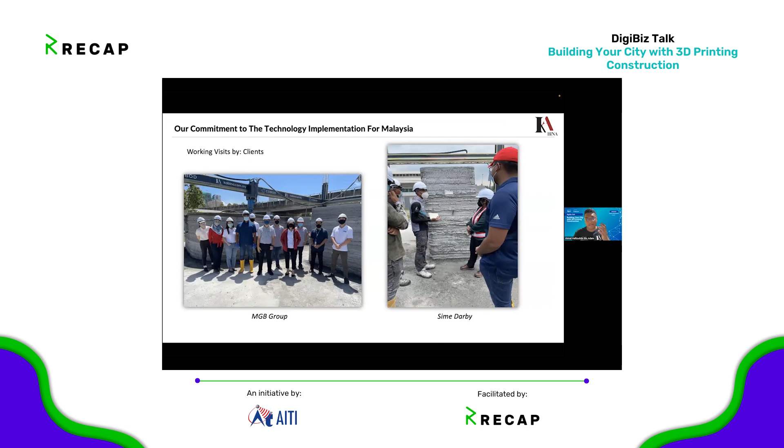So now, last but not least, I think this is the last slide for me. KA BINA aspires to develop the right partnerships with all of the relevant stakeholders in the market, because bear in mind, KA BINA alone, even with the support of COBOD, we cannot go anywhere trying to nudge the market to accept this technology if we are operating by ourselves. That's why we progress by having all of these MOUs signed by regulators, contractors, developers, and even research institutes.

And I think it goes the same with any of the other players targeting to bring in this technology in their market. And it will be the same for Brunei as well, because in order for this latest technology to be adopted, there must be nudges or support by all of these relevant stakeholders. That's why universities are very important, regulators are very important.

I'll just give a simple example of how regulators from other parts of the world are nudging for this technology to be implemented. For example, Dubai have stated in their 2030 vision that they want about 15 to 20% of their housing development to be 3D printed.

These are the kinds of policies that can ensure the market is more incentivized to adopt this technology. Hence, we are starting conversations with the market and the regulators to ensure that perhaps, rather than focusing on IBS, which has been talked about for more than 20 years already, now we have to shift to the technology of the future, which we believe to be 3D construction printing. So the conversation must start now, and the market must be open-minded to accept this technology now.

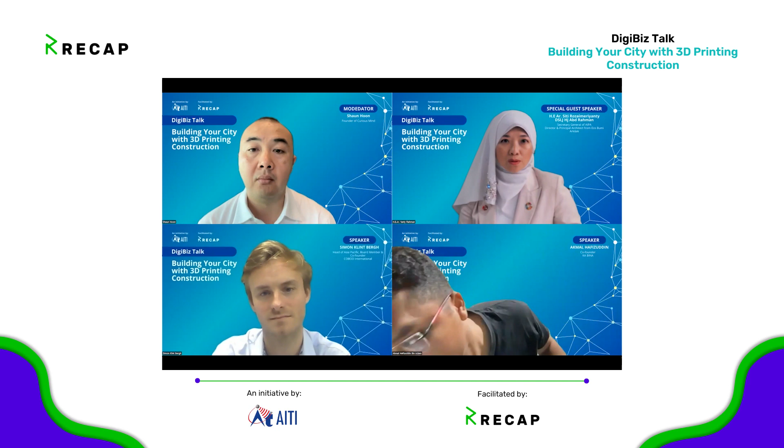It's really interesting, because for 3D printed construction, you are not dealing with the normal traditional team. Normally we have engineers, M&E, C&S, but you also deal with IT engineers, so you actually bring in the great minds in this field. But also bearing in mind, authority compliance is a must. So I also foresee that doing this kind of project is front loading—you do a lot of your design on the front end, because you must know where your cable tray will come in, since you have to put in your conduit first before the layers and layers of printing come in.

Bearing in mind, you're not going to hack after you missed a point. So everything, if you use building information modeling, whether it's BIM or SketchUp, everything has got to be integrated - structural components, mechanical or electrical, where your power point is, where your switches are going to be. Everything needs to be front loaded, which is good, because you're not supposed to be making that many mistakes when you actually start printing. That's why you only need technical people to run the printing itself. But when it comes to the whole design, you really need the team to put more effort to make sure it is a complete design.

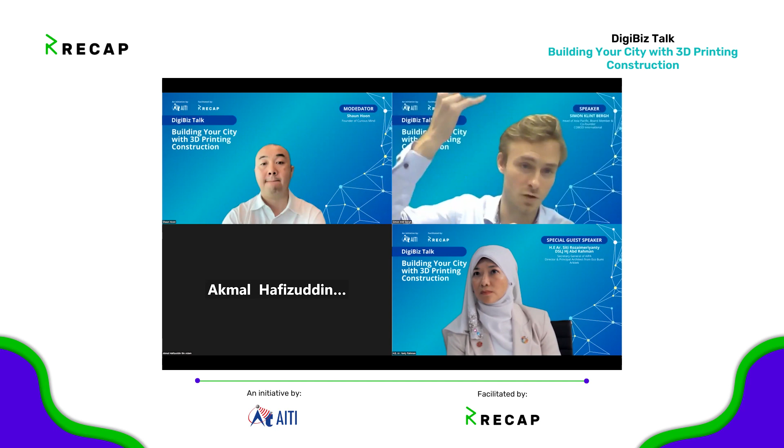Can I answer? Yeah, that's for you, Simon. Thank you. So I want you to look at it like this—we said we are open sourcing material, right? Depending on the material you put in, it's a concrete wall of that material. That's exactly what it is. So a cast material would be of the same standard—look at it as a cast concrete wall. The material guys from our side will come down and make sure that the mix you're using creates uniform layers, meaning that if you cut through the wall, you'll see that all the layers are totally monolithic, meaning they are all together. So you can see it as a concrete wall and compare it to the lifespan of that, dependent upon the materials you use. But as a concrete wall, it's a long lifetime wall, especially if you maintain it well and paint it—then you'll have a house for many decades.

Fantastic. Akmal, do you have a favorite question you want to address? I think I can see that a lot of repeating questions are on how do you do plumbing and electrical services in the house, right? So there's actually two ways. One of the ways that we did with our first 3D printed house in Kuala Lumpur was we had a double wall system.

It means that you have an outer wall, an inner wall, and a cavity in between. So the way that you would lay out the services is through that cavity. And of course, Her Excellency mentioned that the bulk of the planning of the house is upfront, so that when you are designing the house, the electrical services have already been factored into where it's going to run.

So having that in mind, as you are printing, you already have the cavity and you've communicated with the contractor where these plug points should be. Even if you want to do the plug points, there's two ways to do it. One, either you input the cavity or the places where you want your plug points inside the drawing, or the other way is you print as per normal.